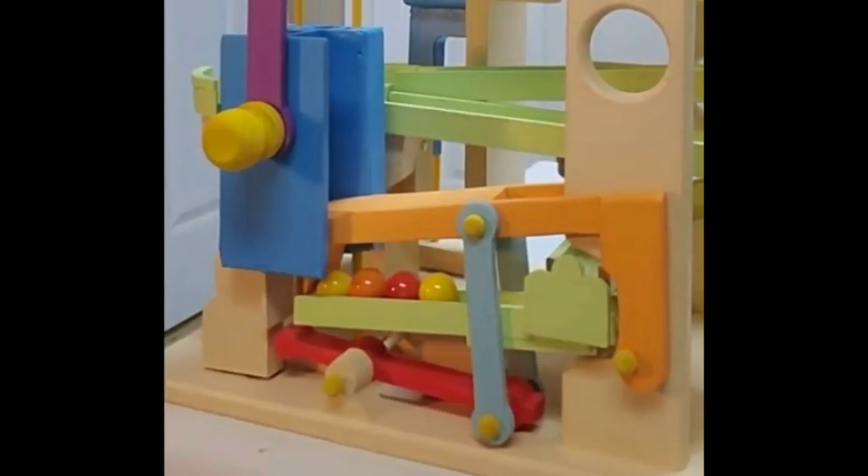In this short video, I'm going to show you how to use the MotionGen simulation program to design a pretty interesting marble escapement mechanism. A little background on myself: I like designing and building hand-cranked marble machines. A few days ago, I just did discover a free simulation program called MotionGen.

With all software, there is a learning curve. It takes a while to learn how to use it. I like video examples to help me quickly learn how to use a new program. I decided to make this video to help people quickly learn how to use this software. And as I said before, we'll be designing a rather unique marble escapement mechanism.

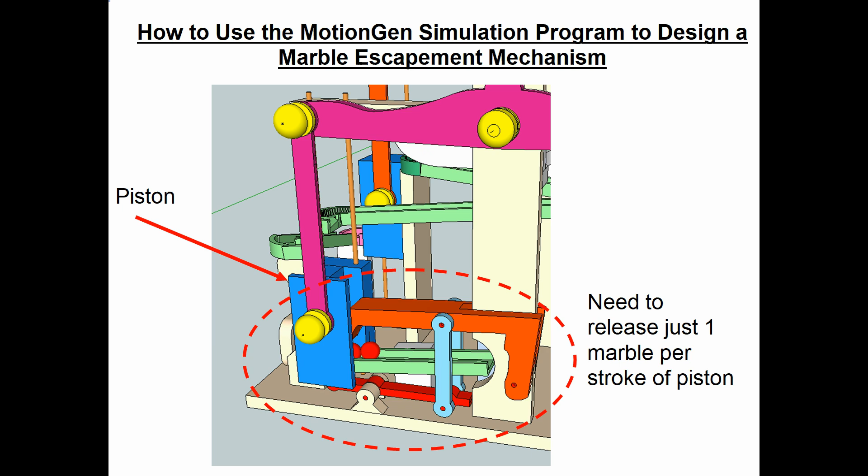Now, in this view from SketchUp, I took off the front part of the piston so you can see what's going on inside. There's an angled hole drilled in that piston. These are 1-inch marbles. So we want one marble to load into the piston, but not the next marble. So we want that orange arm to come down and keep the next marble in place until the piston goes up and comes back down, ready to load.

Now, I decided to use the bottom of the blue piston to actuate this mechanism. And we can vary it, but I kind of targeted a 1/4 inch of travel, the last 1/4 inch at the bottom. You can increase this if you want, but that's what I got. So since the marbles are 1 inch, we're going to need that orange arm to lift up a little bit more than 1 inch to clear the marbles.

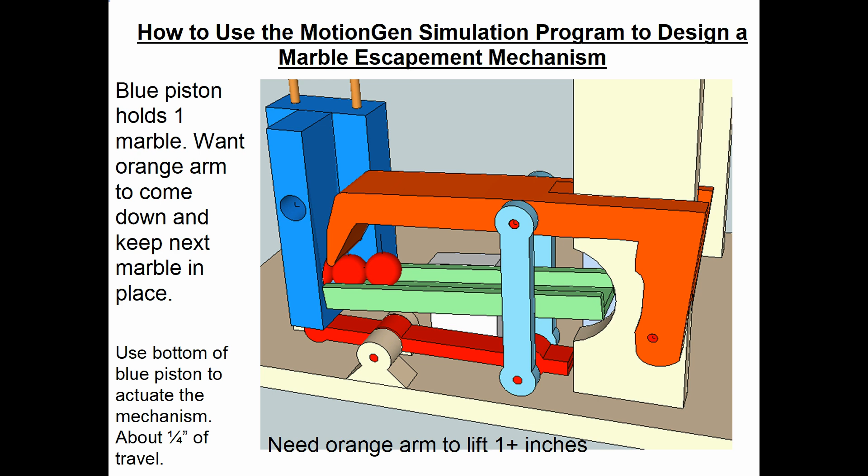Now, several weeks ago, when I actually did the design work and figured out this loading mechanism, I did it all by trial and error in the SketchUp drafting program. In retrospect, it might have been easier to first use this MotionGen program to get the motions right and then draw it up in SketchUp.

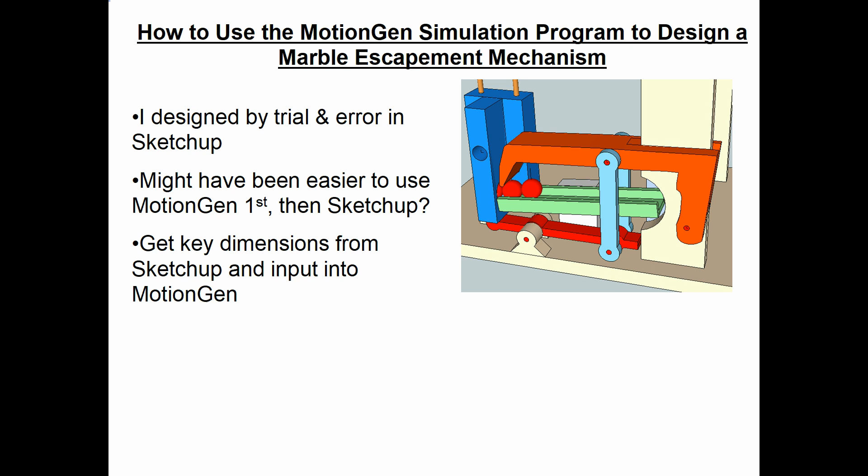But since I have it done, we'll get the key dimensions from the SketchUp drawing, and we'll use those and put them into the MotionGen program. You could start out in the MotionGen program and try to generate it from scratch, and then take it into SketchUp, whichever way works for you.

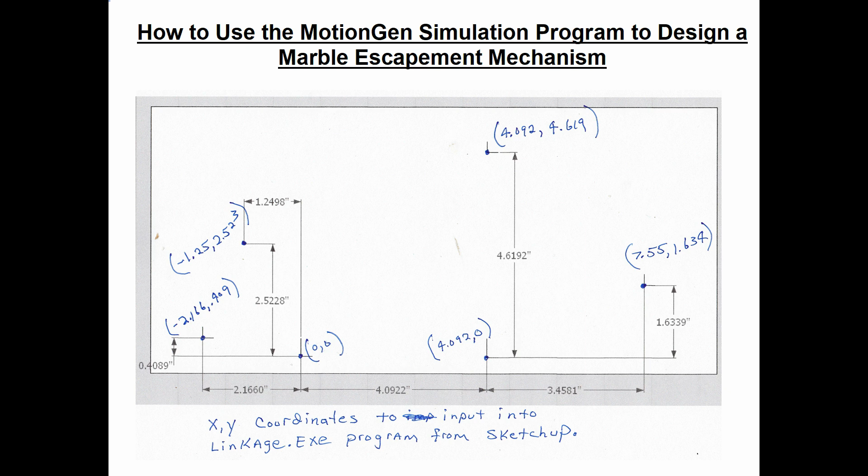Now, don't worry about reading the numbers here, but I'm just showing you that I went into SketchUp, and then I measured and found the XY coordinates for all the key points in the linkage. Once I know those XY points, I can enter those into the simulation program.

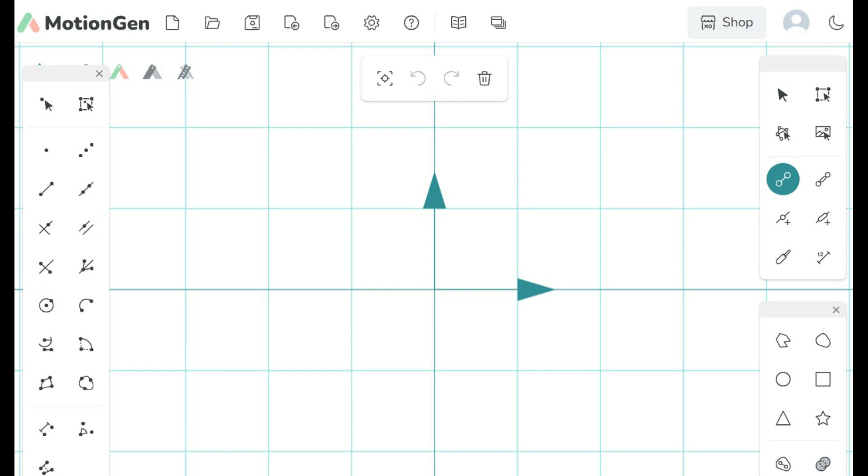Now, there's probably a more efficient way than what I'm going to show you here on how to draw a representation of that swing arm, but this method works, and you'll probably figure out a faster and easier way, but at least it's one way to make it work. So let's just add a link off the menu to get started.

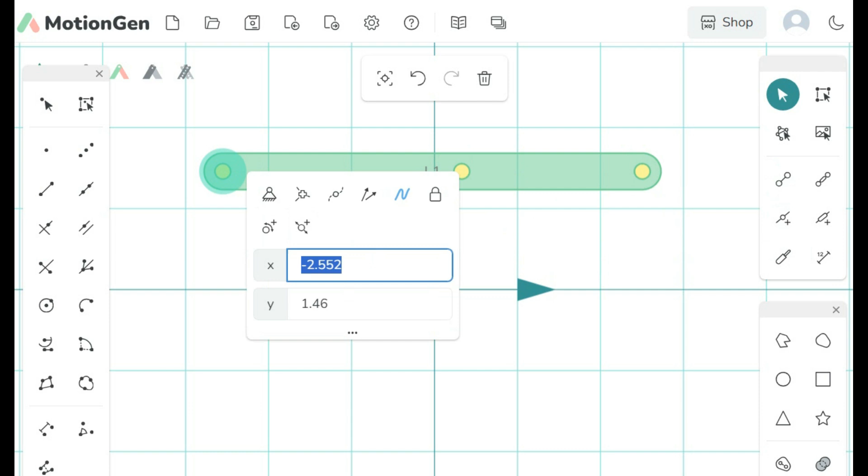But this has 3 key points on that swinging arm. So let's add a joint from the menu, add joint, doesn't matter where. Okay, from SketchUp then, we know the tip of this, so we know the coordinates. And the coordinates for the tip are minus 1.25.

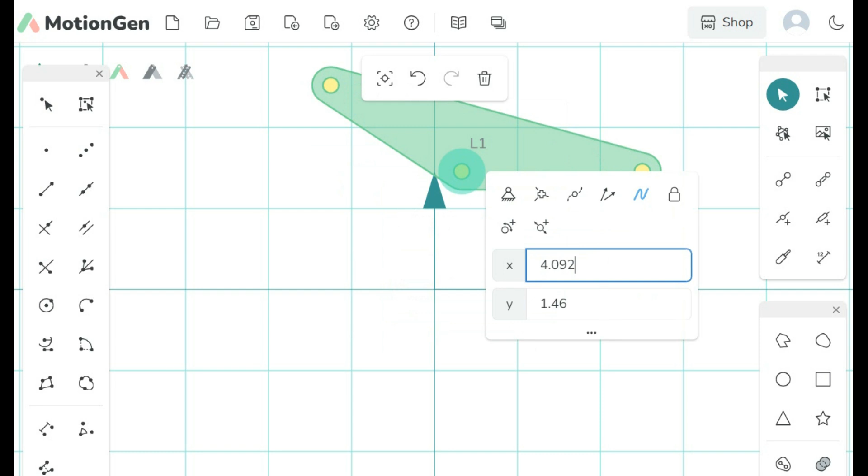And the y coordinate is 2.523. Okay, now for that center pivot point, we know the coordinates for that, and that should be 4.092 X, and Y is going to be 4.619. Then for the right hand fixed point over here, we know the coordinates for that should be 7.55 X, and Y should be 1.634.

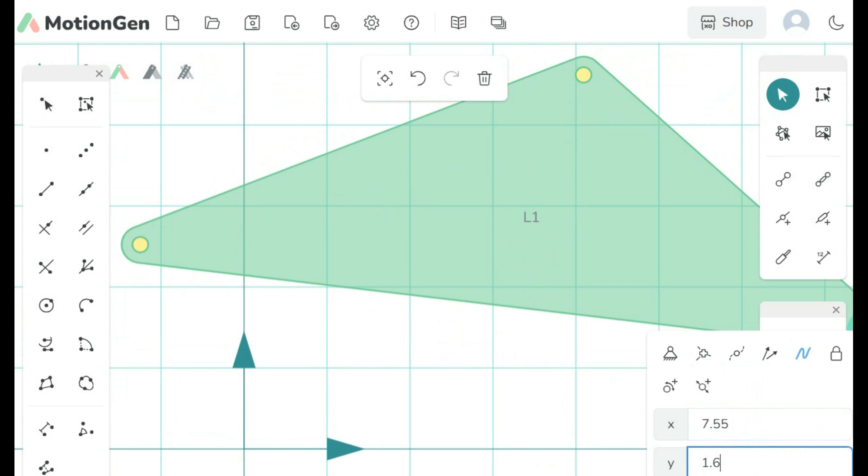Okay, we'll scroll out a little bit so we can see it better. Okay, now there's another feature called Draw Arbitrary Polygon. So we're going to try to draw a better representation of our swing arm. And once we get that done, we'll merge it in with this, and that'll be a better representation. So let's click on Draw Arbitrary Polygon.

Let's try taking it up at an angle a little bit above that pivot point like that. We'll bring it on across. We'll come down over here. Now we need to be below that point, so it's included. Then we'll take it over here. And I'm going to bring it down a little bit below that point. And I'm going to connect it there. Okay.

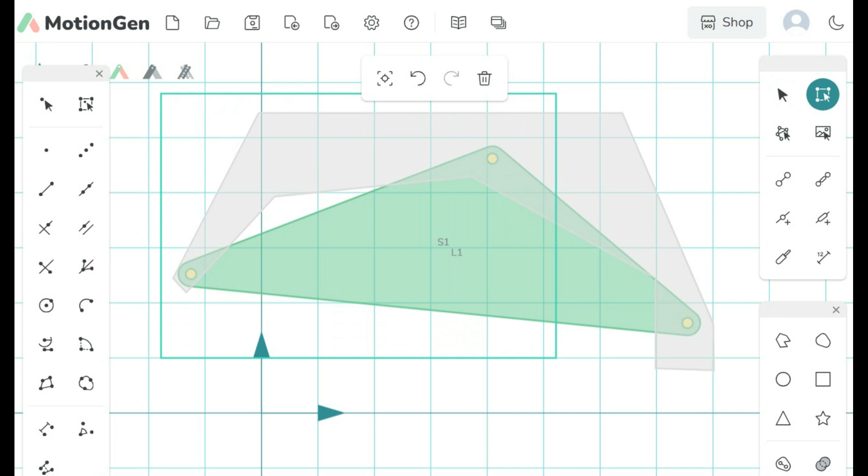Now we're going to do multi-select. Pick the whole thing. Then down on the menu near the bottom, there's a merge command. So we're going to hit merge. And voila! We have something that looks closer to our swing arm on that side. So we can build the rest of the mechanism next.

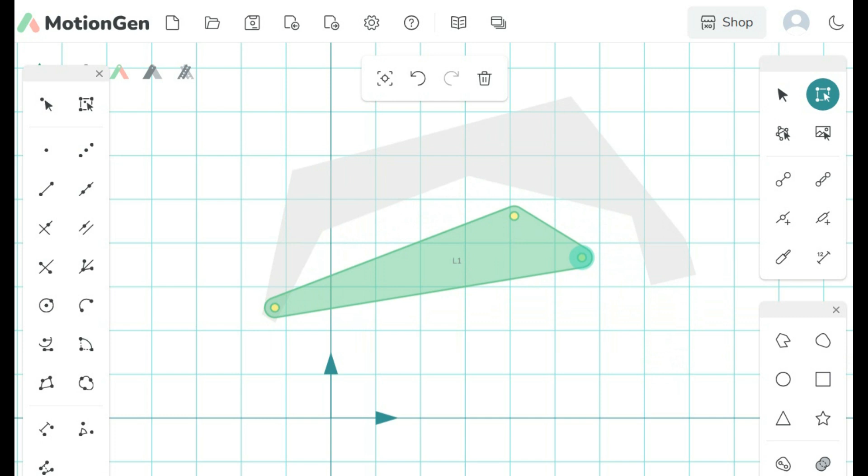One thing I will point out though, if you try to move one of these points, you're probably not going to move the tip. But you may want to move this pivot point up here or the pivot point on the right. And if you attempt to do that, we'll show you, it screws up the shape of your arm. Okay? So we will return it back.

Okay. But if you want to move that pivot point and see what happens, all you have to do is go in and add a joint. And let's say you want it here. And that particular joint, you can move that around and it doesn't mess up the shape of your arm. So watch, we'll move it up here and it has no impact on the arm. So that's a way to try out different geometry without messing up the shape. Yep, we got rid of it. Okay, we're ready to build the rest of the mechanism.

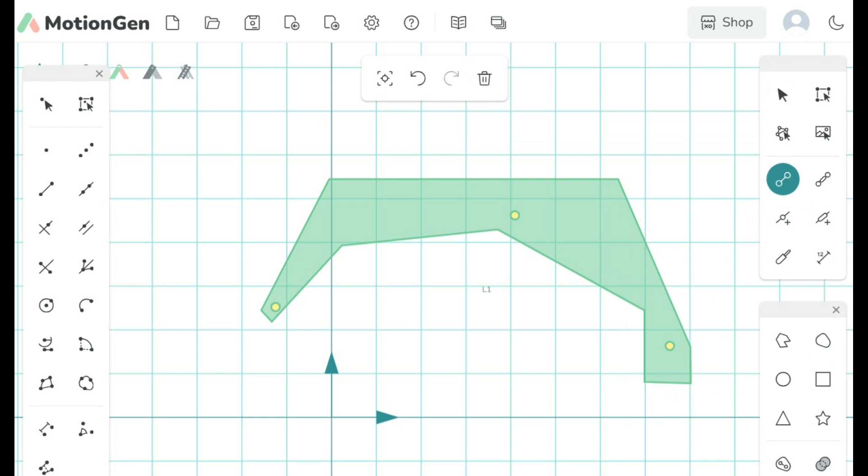So now we'll do the little link at the bottom, which is kind of a balancing beam type thing, or a cantilevered beam. Oops. I don't know why I drew multiple links there, but okay. Now this one also has 3 points on it, so we need to add a joint. So go over and pick Add Joint.

We'll put it there. Okay, so on the left hand, from SketchUp, we know that X is minus 2.166 and we want Y to be 0.409. The pivot point in the center, we want to start out and make that 0, 0. So that's 0. Then on the right hand point, we know that needs to be 4.092 X, and Y is 0.

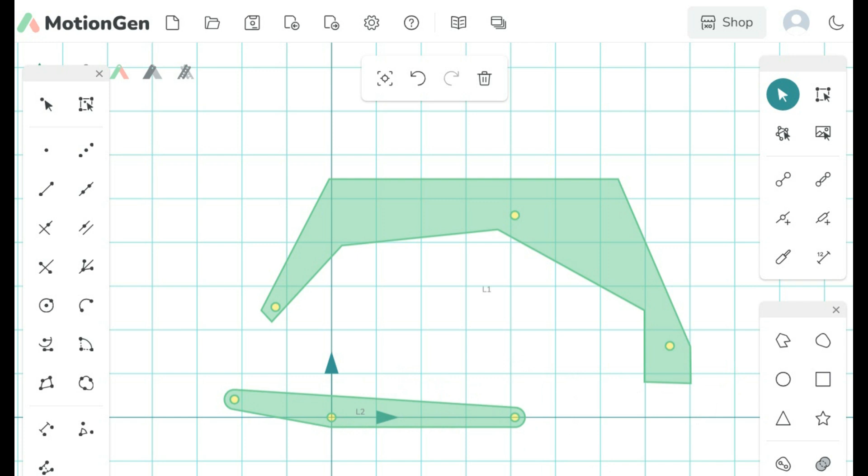There's that geometry. Okay, the only other element here, we need to link between the swinging arm and the little cantilever beam, so we'll add a joint. Okay, so the basic mechanism is drawn, but we need to anchor this one over here. So it's now grounded, as they call it in this program. We're also going to need to ground this point over here.

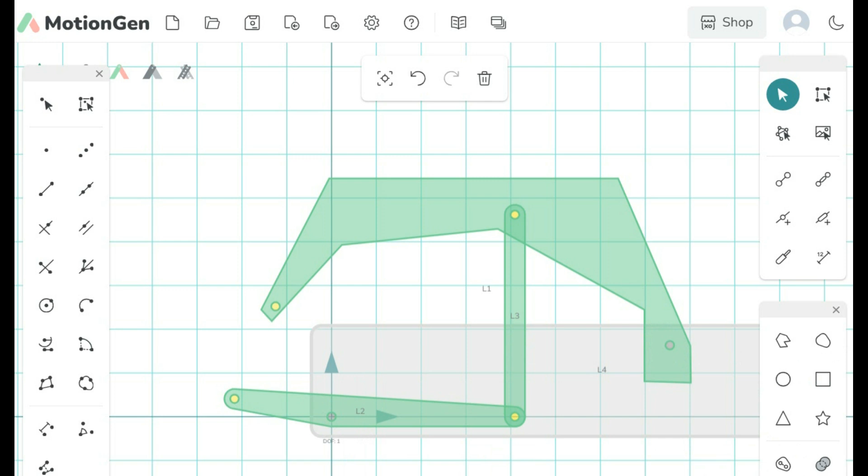Okay, so now we just need a way to actuate it. So let's pick the point over here. So on the working model, we're going to have a piston that comes down and pushes this link down. So we're going to simulate that, we're going to add a linear actuator here, and we'll turn it around so it's this direction.

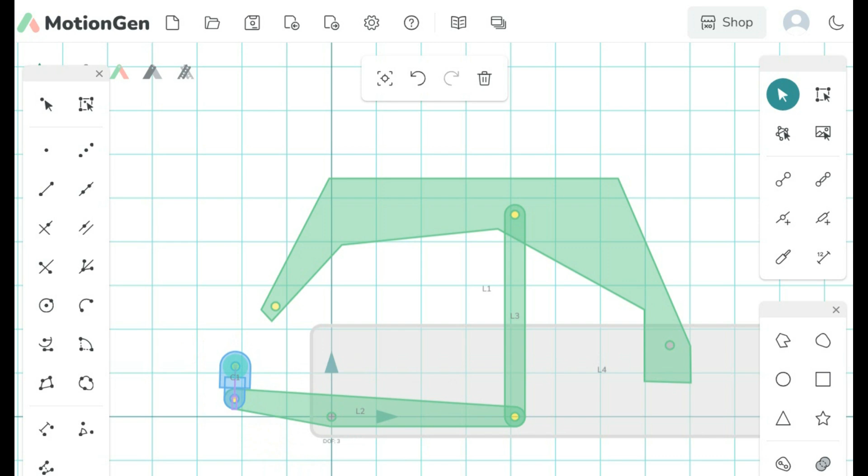Now we're going to go zoom in on that actuator, linear actuator. Try to get it around there. And if we click on the actuator, not the point, it should show us the stroke. And it's got a stroke of 0.135. Let's try putting in a stroke of 1/4 inch, 0.25.

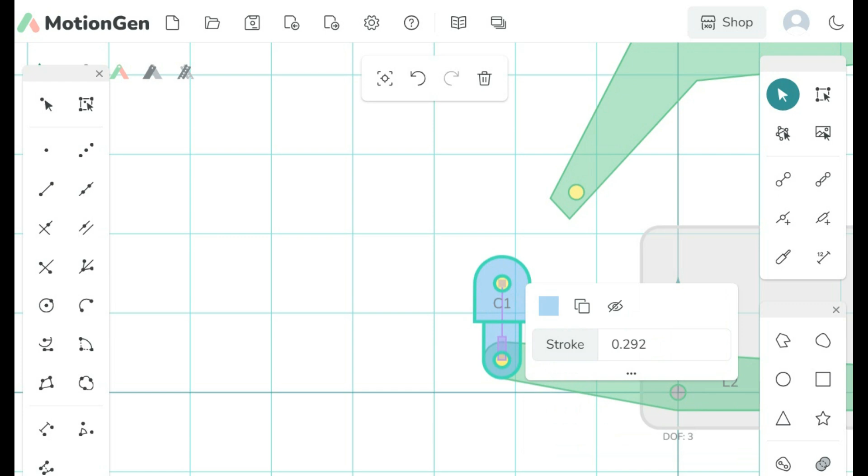Didn't really change it. So what I found is if I just kind of trial and error, and I move it up a little bit, now we're at 0.145. Now we're 0.292. We're close to 1/4. Maybe bring it down just a hair. 0.29 yet. Oh, it's not changing. I don't know why.

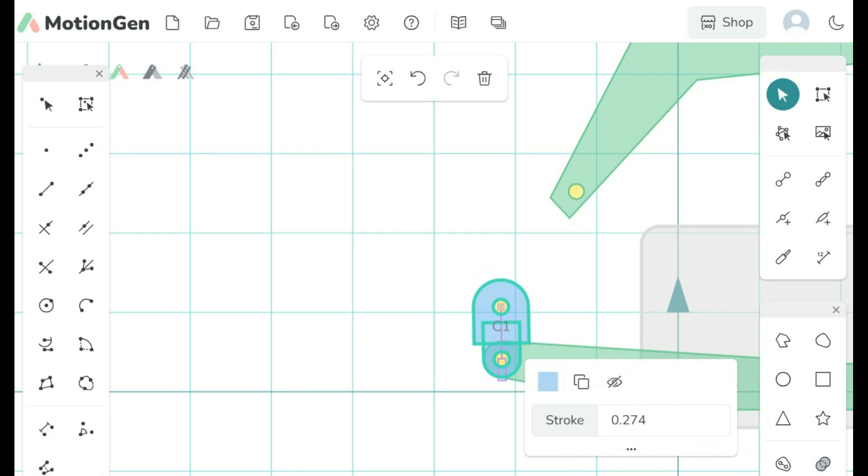Okay, 0.27. That's close enough for right now. You can play around with it some more. Now notice as we scroll out here, we don't have the play button for simulation. So that means we haven't completed it. So what are we missing? Well,

is that grounded? Yes. I'm not sure what we're missing. So let's take this on up just for the heck of it. We'll try it the other direction. Not sure why our simulation's not showing up here.

That's grounded, which is what we want. That's not grounded. That one there is grounded. So the simulation play should be showing. Not sure what's wrong at this point.

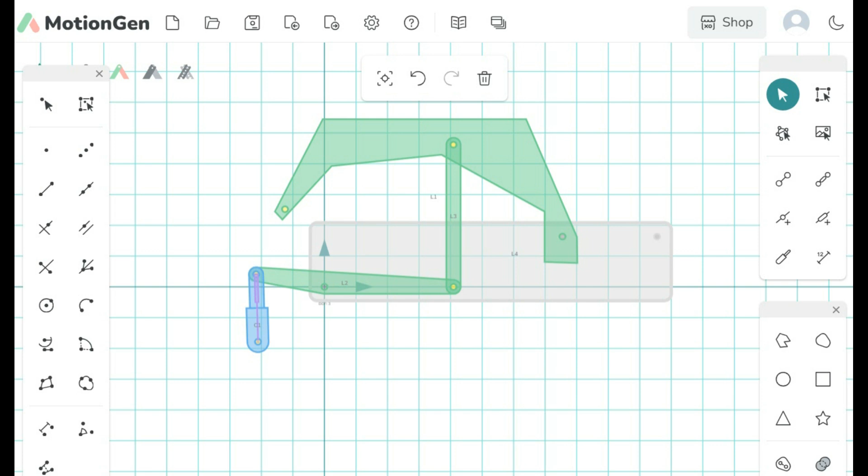Oh, wait a minute. I forgot to ground this end down here. Sorry. There's the blue lines and the simulation play is going to be up. So I forgot to ground that. So let's go back down here.

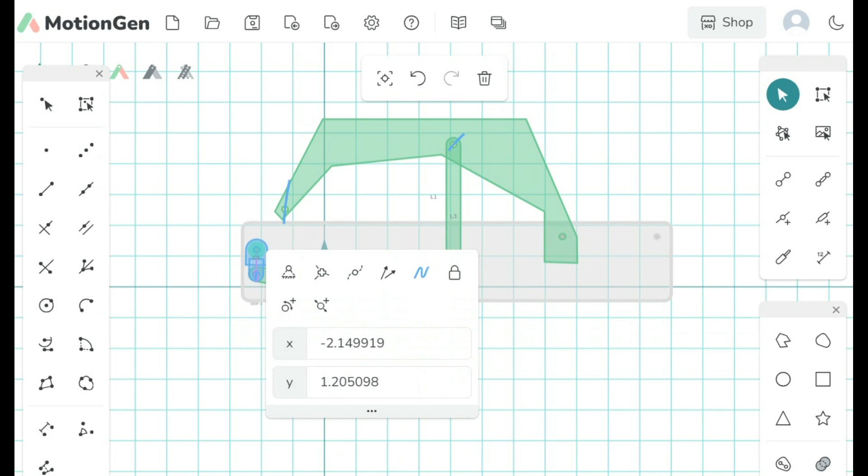And let's click on it again, see if we can get the stroke out of it. 0.309. We're just over our 1/4 inch desired stroke. We could go in and massage it just a little bit down, just a hair.

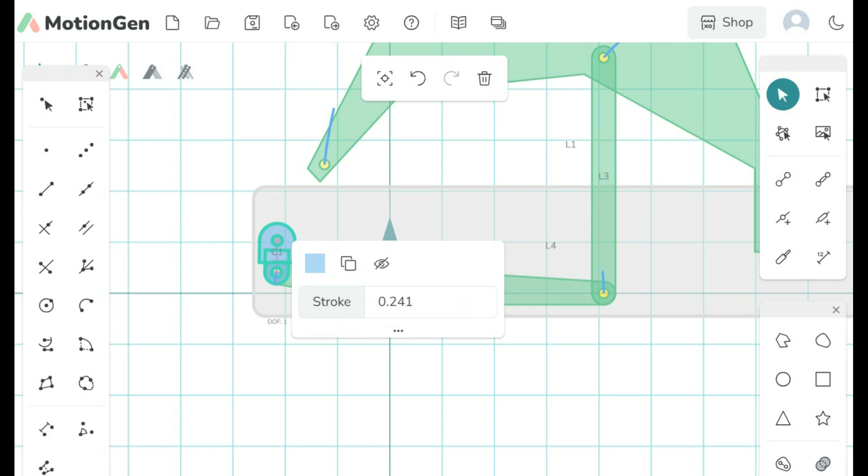0.309, we're just a hair over. We'll move it down just a little bit more. 0.24, we're close to 0.25. Okay, let's zoom out so we can watch it run.

Now, what's interesting is it shows the path of the moving elements in blue. So the key one over here, that point we want to go down in the marble, it's showing how far that's going. Now, each grid on here is 1 inch. So right now, just eyeballing it, it's moving about 1 inch. That's about what we want.

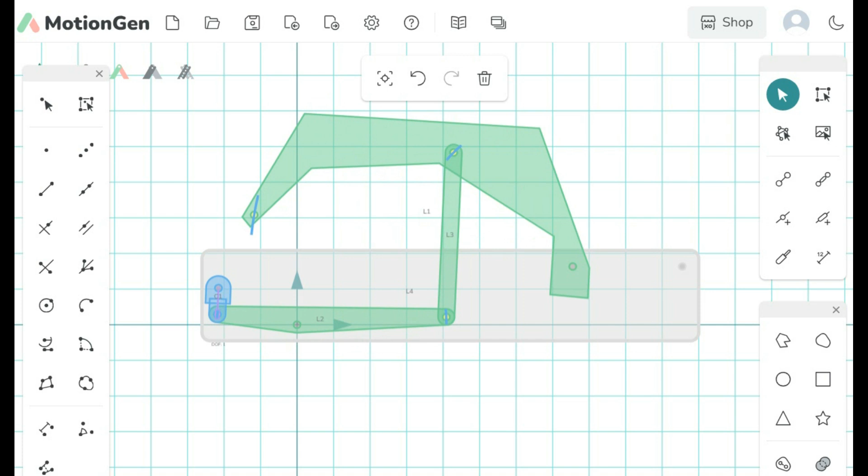The marble's 1 inch, so we're going to need it to go a little bit more than that, but we're close on the ballpark here. So let's run the simulation. Simulation's working. Run it again. And here we go. So we've completed this simulation.

Now, in this case, if we want to play around with the stroke of the tip of the arm, we can do that. For example, if we move the fulcrum point to the left, that's probably going to increase the stroke. Yes, it does, dramatically. And if we move it to the right, it's going to decrease the stroke, which kind of makes sense just looking at the mechanism

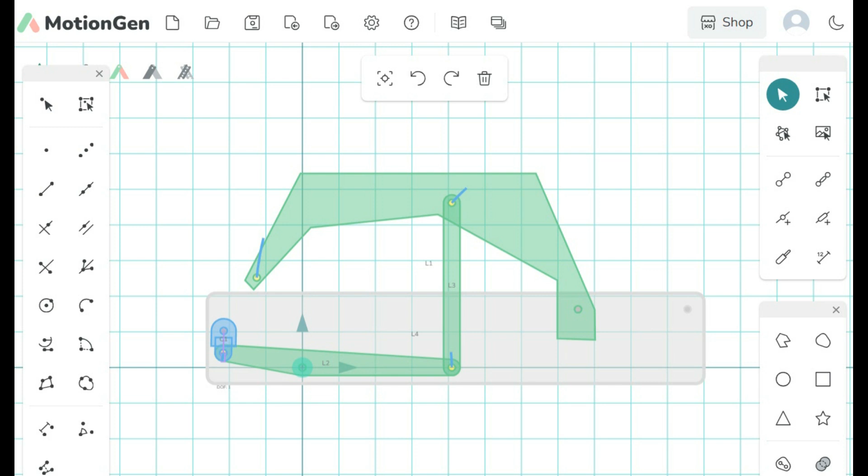on that side. And as I said before, if you want to move this pivot point up here, you probably need to add a joint and then move that around, and leave this one alone, because if you try to move this one, you're going to destroy the shape of the arm. Okay, not too bad. It'd be a pretty handy method to play around with this mechanism. And we know we have around 1/4 inch of stroke over here, and we want a little more than an inch and a half travel over here. So you can optimize the design, go back into SketchUp, and then modify the design.

So some closing thoughts on this video. This MotionGen program is relatively easy to learn how to use, and the simulation software can be a very valuable tool compared to just using a drafting program only. So in summary, this video explains how to use the MotionGen simulation software to design a marble escapement.